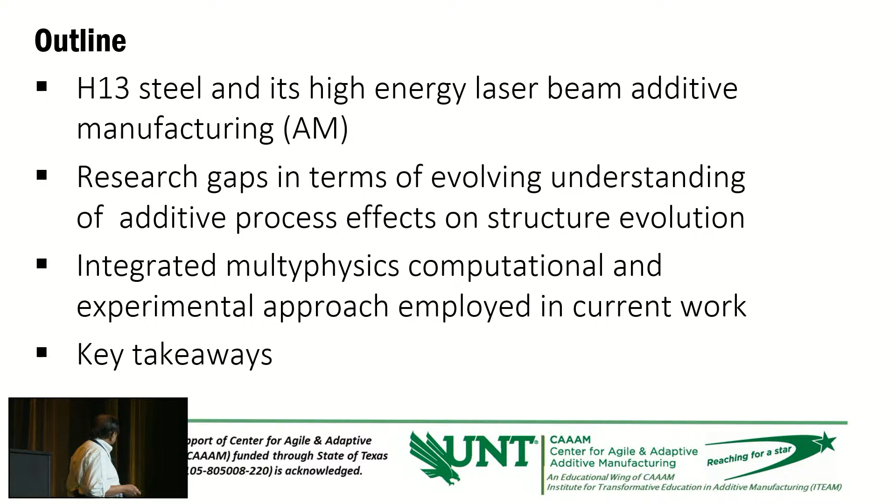As I said, H13 steel is very difficult to manufacture, especially with AM technology. It has very good high temperature mechanical properties. That's why it is used for permanent die molding, die casting molds. Most aluminum car engines are cast using these H13 molds, and many other automotive parts are cast using H13 tool steel.

So it's a very expensive material. I work with a lot of automotive companies. The dies are very large, especially when casting an aluminum car engine, which is pretty big—4-cylinder, 6-cylinder, 8-cylinder engines. So the die is also very big, and several other components are also cast out of aluminum using the H13 die. The molten aluminum is poured into the die, the casting cools down, and then it's removed from the die. But as you know, the automotive industry is a high volume industry.

So all these components are produced by the thousands in a day. The way they process this material, the casting is: they pour the aluminum in the die, and then the die moves into the next station where it is cooled by water spray to reduce the cycle time, and then that die is again used for the next casting. So it's continuously heated and cooled in a process, so it has to resist the thermal cycle.

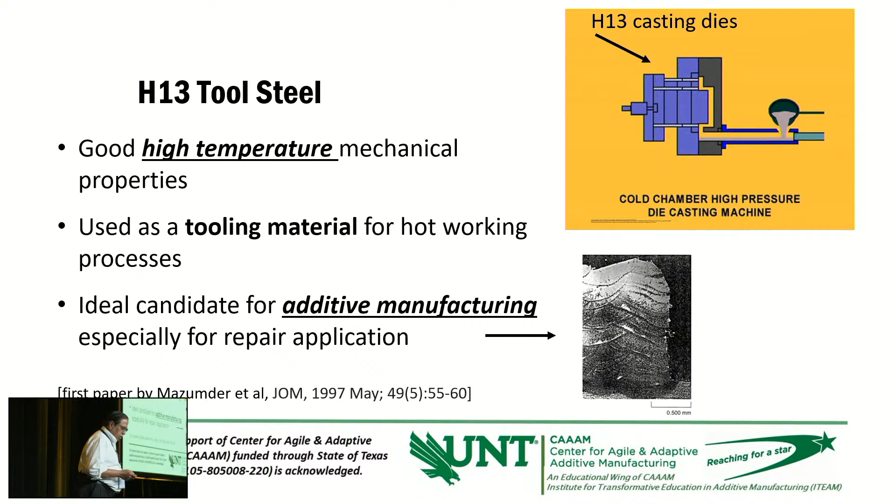So as early as the late 90s, this technology was used to produce H13 dies. There are a few efforts in the literature showing that these H13 dies were made using a high energy source beam with additive manufacturing technology. There are people who have used electron beam along with laser to deposit or manufacture these H13 dies.

Now, if you use laser beam technology, as I said earlier, it involves a very short time. Typically, the interaction time of the laser with the material is less than milliseconds, sometimes nanoseconds. And what happens is the time is very short and the interaction zone is very small, because the laser beam typically used in this additive manufacturing process is a few microns in diameter. So time is short, as well as the interaction zone is very small.

So what happens is monitoring this process is very difficult. If you want to do any in-situ diagnostic to see what's going on in the laser material interaction region, such as measuring temperature or looking at fluid flow characteristics in the interaction zone, it's very difficult - because the time is too short and the zone is too small, and there aren't many in-situ tools which can respond to these kinds of extreme conditions.

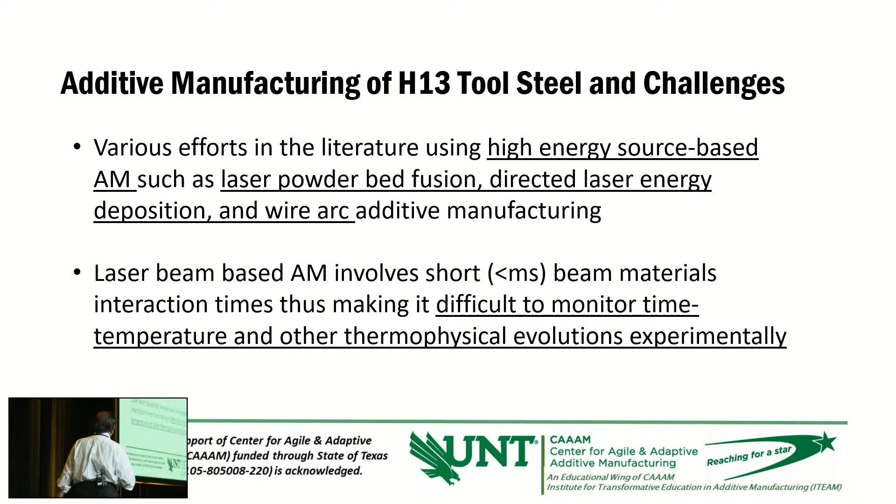So it's very difficult to monitor the AM processes. The only way you can do process predictions or gain understanding of this process is computational modeling.

In addition to these extreme thermophysical conditions, this process becomes more complex. The AM process becomes more complex because, as you know, the laser has a very small beam diameter, so you can fuse only a small portion of the material. So with that laser, you have to create a layer by putting multiple tracks in one layer, and then you have to deposit several layers to create a component of reasonable size and shape.

So it is a multi-track, multi-layer process that creates very complex thermokinetics in the process. And thus the process becomes very difficult to monitor, to control, or to get an understanding of.

In literature, people have tried to model this process to get better understanding, but most of the modeling is confined to either multi-track single layer, single track multi-layer, or single wall process. So what they do is model only a single layer with multiple tracks, or one track built by multiple layers. None of these two conditions come close to a multi-track, multi-layer process, where the thermokinetics is way more complex than what is projected by these two approaches.

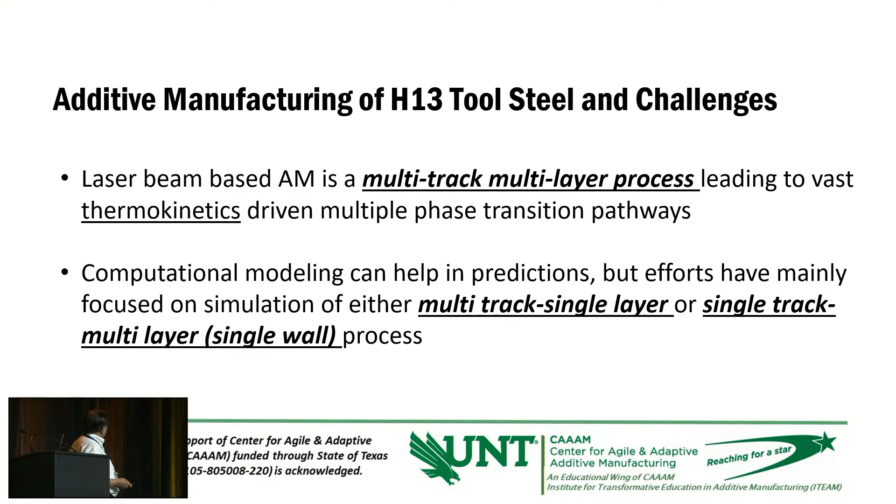So what our group, or our center, does is try to go as close as possible to this actual situation. I'm going to give you some snapshots.

I want to go back and emphasize the process parameters involved in additive manufacturing, especially laser-based additive manufacturing: laser power, laser scanning speed, the way the laser beam moves and the speed it moves at, beam diameter, and hatch spacing. Hatch spacing is the spacing between two tracks put next to each other, and then there's scanning strategy. I will talk about scanning strategy in the next few slides.

These are the major parameters associated with the laser-based AM process, and depending upon the combination of these parameters, the material produced after printing goes through solidification, giving you a different solidification morphology in the printed component.

It also controls the state of the phase, because the kinetics of the process controls the type of phase produced. It also controls the crystallographic texture depending upon the thermokinetics of the process, and sometimes brings in defects in the component, because the process is so rapid that it freezes the material and leaves behind porosity. It also controls the grain shape, size, and morphology. All these things are affected by the combination of parameters chosen during AM printing.

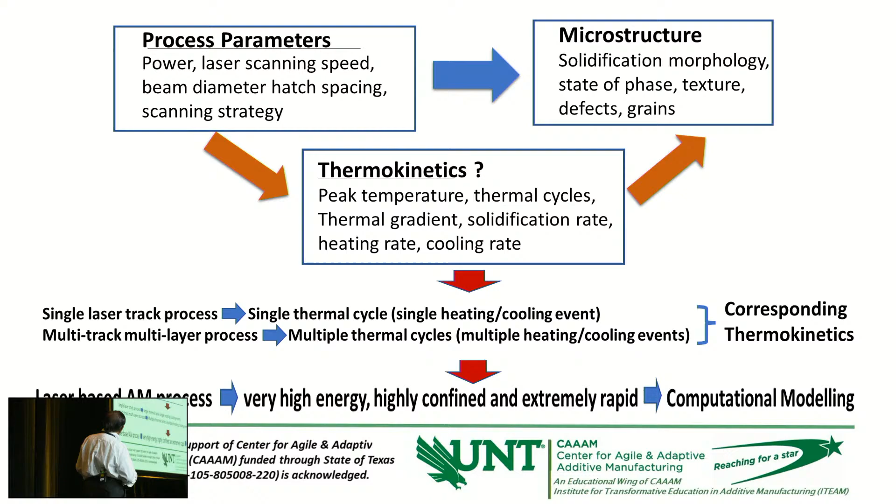So you want equiaxed grains oriented in different directions to get uniform properties in the material. To avoid the elongated grain situation, there are various scanning strategies, which I mentioned earlier. One strategy is to go in the same direction, which produces the elongated grain.

If you don't want elongated grains, we scan the beam in one direction in one layer, rotate it through 90 degrees, and scan in another direction in the second layer, then keep repeating that alternation of scanning direction from layer to layer. This creates a disruption of the epitaxial grain growth through the layers, giving a somewhat better distribution.

There are much more complex strategies also used. You can change to bidirectional scanning in one layer, going in this direction, coming back, going again, coming back. This bidirectional strategy can be used in one layer, then repeated with a 90-degree rotation in another layer, and that way you can start breaking the grain growth across layers and get much better equiaxed grains.

So there are a lot of ways you can control the grain structure, but in our experiment, we did only 90-degree rotation, an orthogonal rotation in a bidirectional scanning direction, to understand the process.

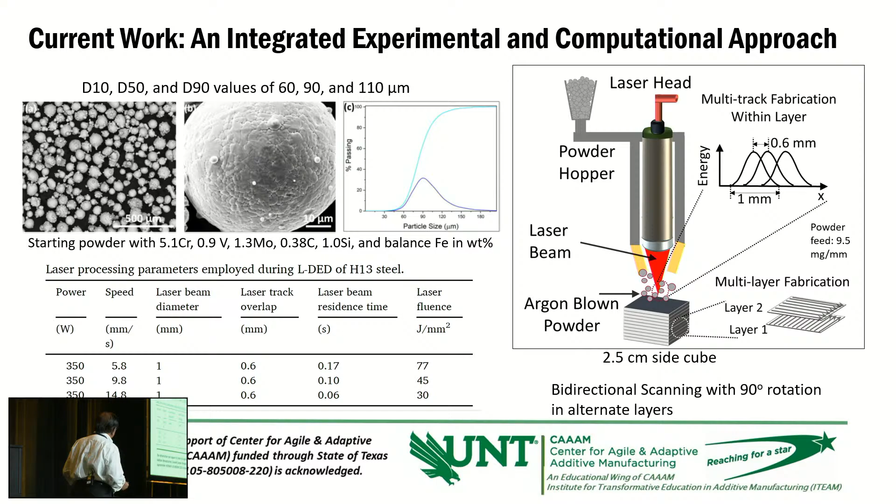So this is the same thing shown here. This is how the scanning is done in each layer, rotation through 90 degrees.

The computational approach developed for this kind of process involves two steps. One is a macro scale thermal model, which involves prediction of multi-track, multi-layer effects, and mesoscale, which is more confined to the thermofluidic model predicted in the melt pool, because the material melts and then solidifies.

Within that melt pool, the behavior is predicted by the mesoscale model, and that is repeated in a macroscale from layer to layer. So this thermokinetics model is divided into two steps: mesoscale and macroscale. Mesoscale talks about the grain growth within one track, and macroscale talks about the grain growth or phase transformation across the layers.

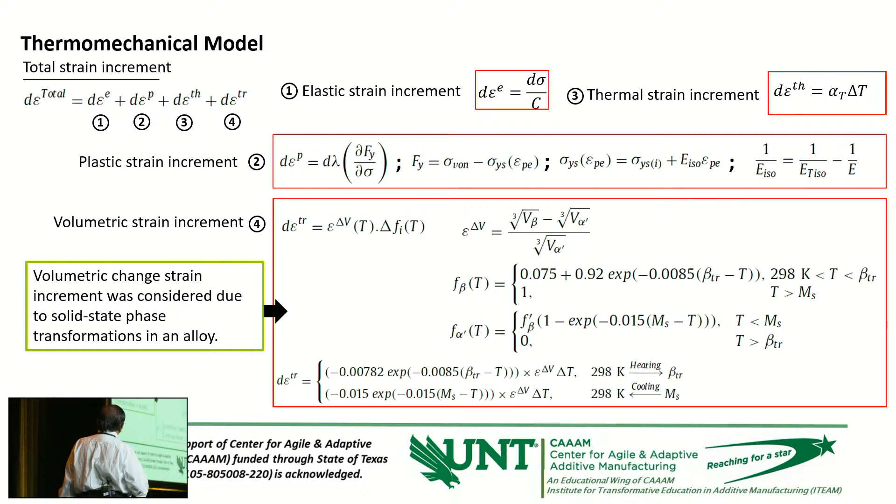These are very generic equations I put in here, and these equations should be solved using material properties. Oftentimes, to solve this equation, you need the thermophysical properties, especially thermophysical properties dependent on the temperature, because it goes through the melting temperature all the way to the room temperature.

So if you have more detailed properties, values of these different properties, the more accurately you can predict the microstructure evolution in the process. Now, one thing I want to show you here, I'm just giving you a broader snapshot. What is important to look for in this model-based predictions?

One is with these models, you can get the solidification rate, you can get a thermal gradient, you can get a cooling rate, and you get a morphology factor.

So solidification rate will control how large or small the grains are formed within the final structure. Thermal gradient will give you how the grains grow, in what direction they grow, and what crystallographic texture will they produce. Cooling rate will again...

decide how fast the material is cooling down from the liquid to solid and within the solid state. And that will decide grain size, shape, as well as the phase transformation. And the morphology factor is, again, whether the grains will be elongated, equiaxed, or something in between.

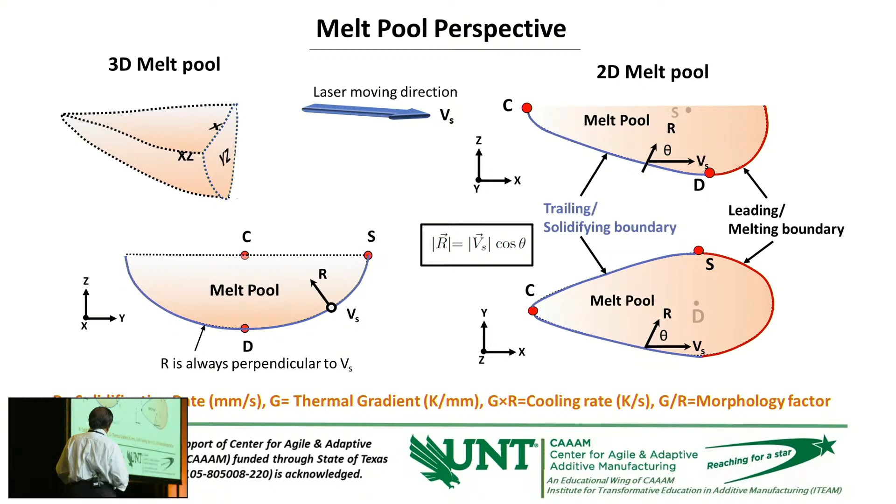So there are a lot of assumptions you have to make because these models are very difficult to develop, and there is not much information available in open literature. So you have to make a lot of assumptions.

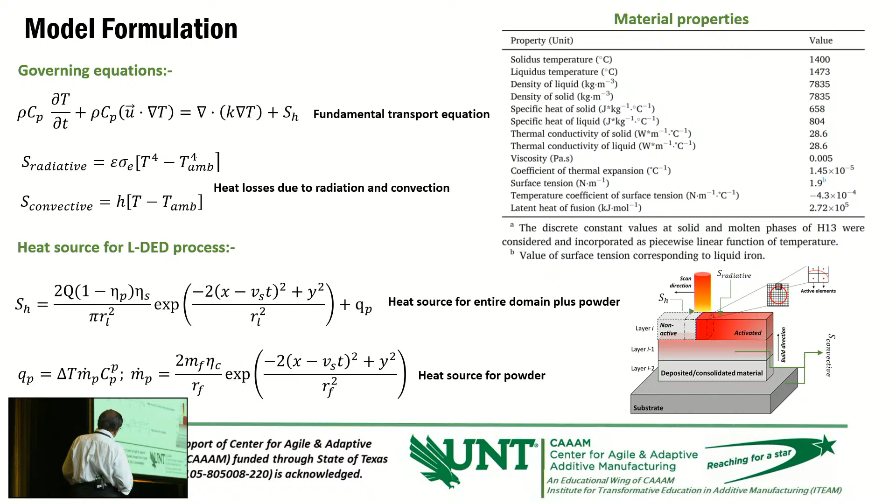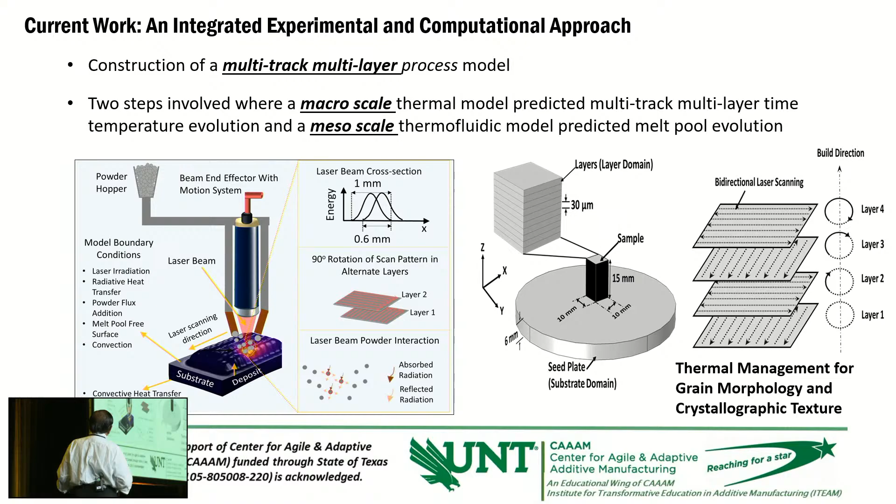Powder addition in the melt pool was assumed to be homogeneous with a Gaussian in-flow distribution. Powders are thrown into the laser beam, and the distribution of the powder flow is Gaussian, given by this equation. The laser beam energy distribution is also Gaussian type, and that is what's considered in the model.

Momentum due to the impact of powder particles on the melt pool was neglected. When powder gets injected into the laser beam, the particles get molten and melt instantaneously, but some powder particles sitting on the periphery of the beam partially melt or don't melt at all, and they go down and impact the melt pool. That effect is neglected here. What we assume in this model is all powder particles melt completely before they go down onto the substrate and form a deposit.

Also, when powder gets injected into the laser beam, it is solid powder initially, so the laser beam gets reflected from the particles, and there's a loss of laser energy by reflection and scattering from the powder particle. That is considered as zero here; we assume there is no scattering and reflection. Over time, we are developing a more complex model which will take all these effects into account eventually, in the next few months to a year. But this particular model does not account for these effects of the process.

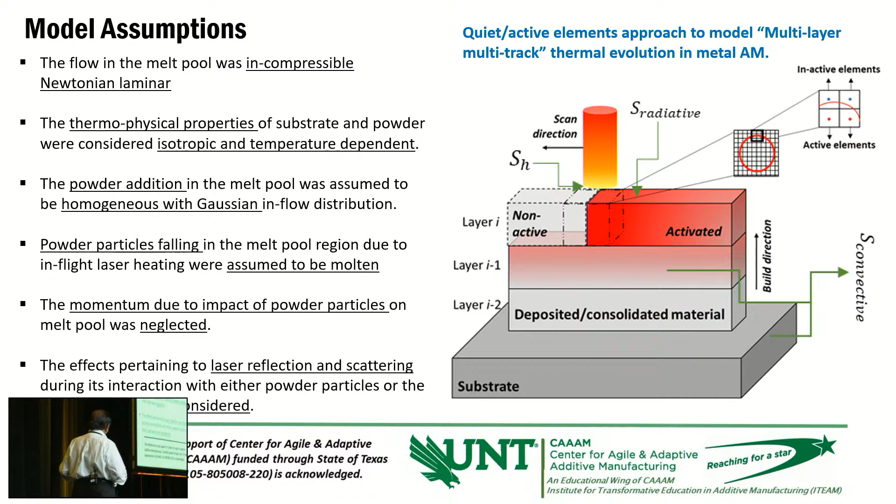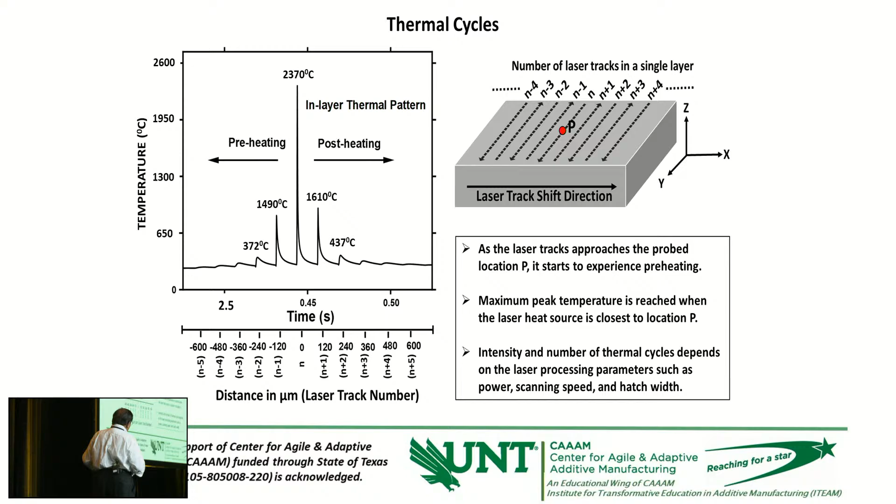So look at the multiple layers. Your computational probe is at the same point in the first layer, and it is now looking at the heating cycles around it, and also above it when the next layer is put above that one.

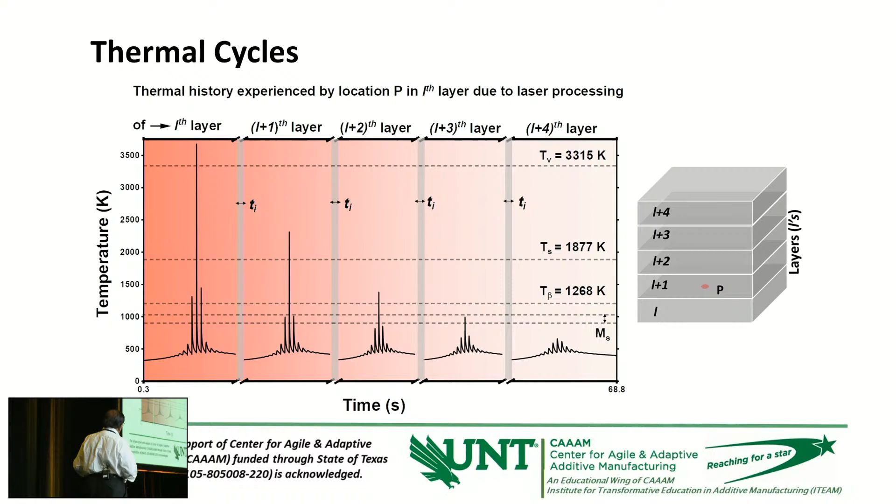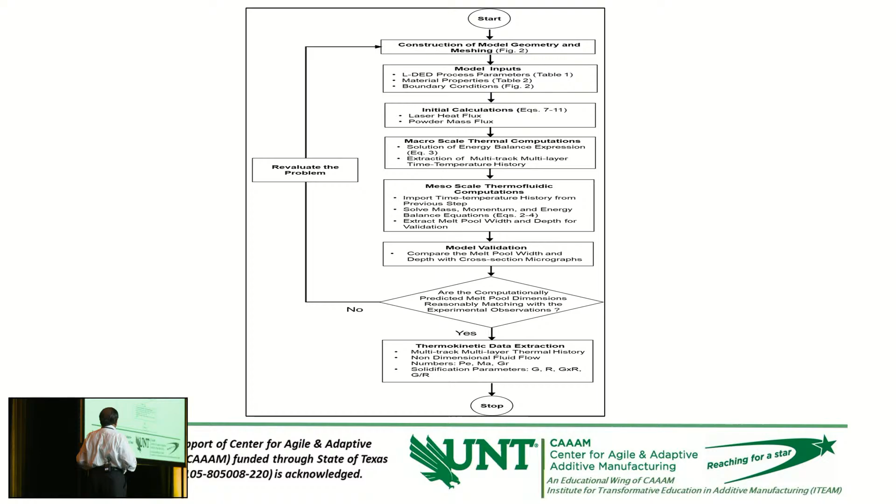So all this is built into this program, and you can predict the temperature at any point in any layer, the temperature cycles, thermal cycles, what it will experience at any point, any layer, and then you can predict what phase transformations or what grain size or grain development will take place at that point. So let me show you some of this kind of model.

So by those models, we first confirm the accuracy of the model by confirming the prediction of the melt depth and melt width by that model. Once if it doesn't match, then we tweak the model to match with these measurements experimentally. And then once it is close enough, that model is ready to use for the prediction of all other effects in the material.

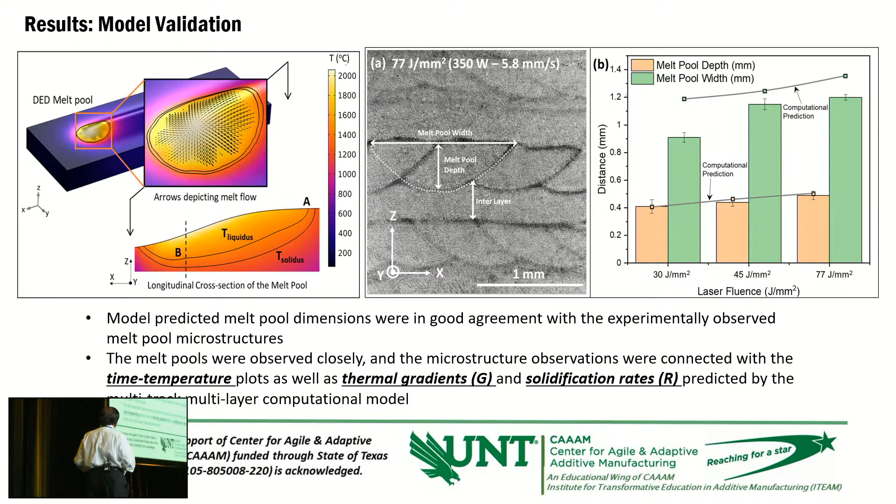So that is shown here. These are computational predictions, and these are the experimental measurements of depth and width, and so on. So with this, then what we do is predict the phase transformation in the material, or the time temperature transformation in the material.

You can see these are three different conditions. As I mentioned earlier, the H13 deposition, the AM process, was done under three different input energies: 30, 45, and 77. These are the temperature cycles, and you can see the highest temperature, various important temperatures given here, and these are the temperatures of the various transformations in the material, H13 - melting point, then transformation of austenite to martensite, and so on.

Those can be easily predicted, and how often that temperature is raised at that point is given by these thermal cycles - the thermal cycles at the same point, layer by layer. In this case, with higher energy input, that one point, the computational probe, experiences high temperature up to the third layer cycle. Whereas it drops down substantially by the third layer under this condition, and it barely reaches high temperature for that point in the third layer, and so on.

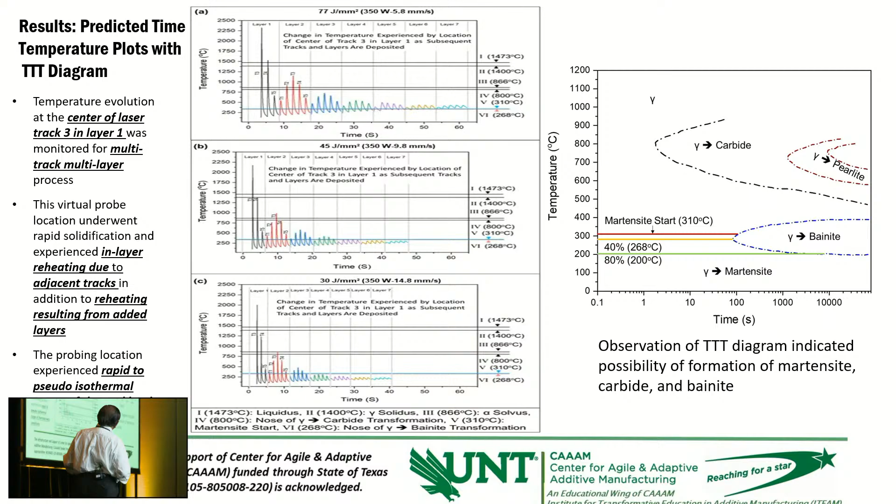So these important temperatures and corresponding transformations are listed here for the H13. Again, the same diagram I have given in a much better expanded version here.

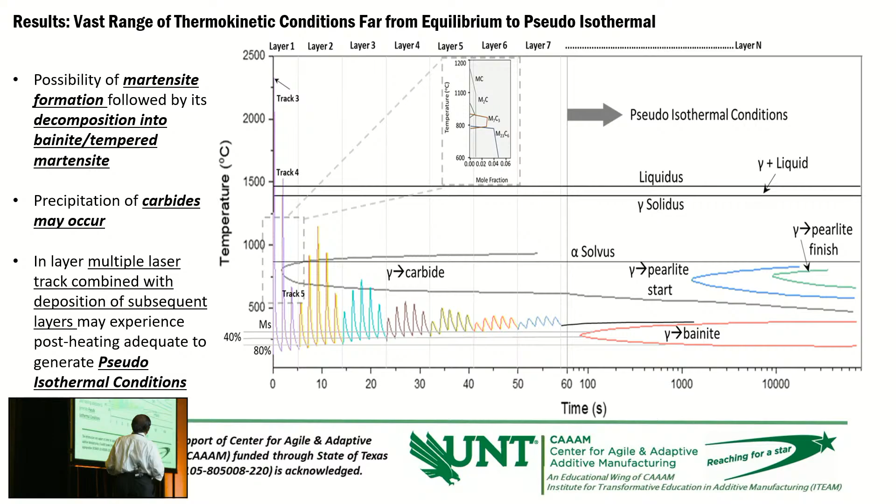So let me explain what we did experimentally. We studied what phases exist in this AM process sample, done by X-ray diffraction, and these confirm that these phases do exist at this temperature transformation regimes and so on.

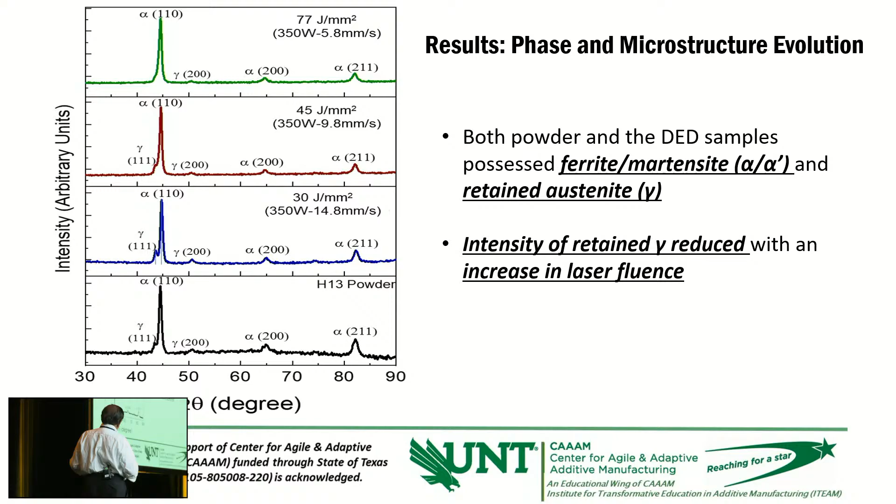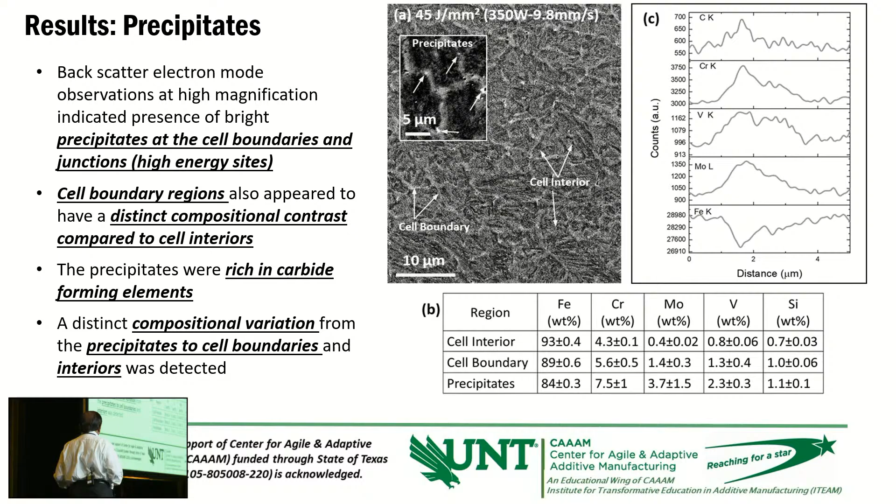All these things can be precisely located. Some of these transitions can be located, such as formation of precipitates along the grain boundaries, along the triple junctions, and composition contrast in the cell interiors. All those things can be predicted by these thermokinetic plots, plots of the different thermokinetic parameters as a function of time or distance.

So we have done quite a bit of detailed observation using techniques such as transmission electron microscopy to see whether these kinds of plots are predicting temperature and various events during the thermokinetic process at different locations like this. And they were indeed noticed through these observations.

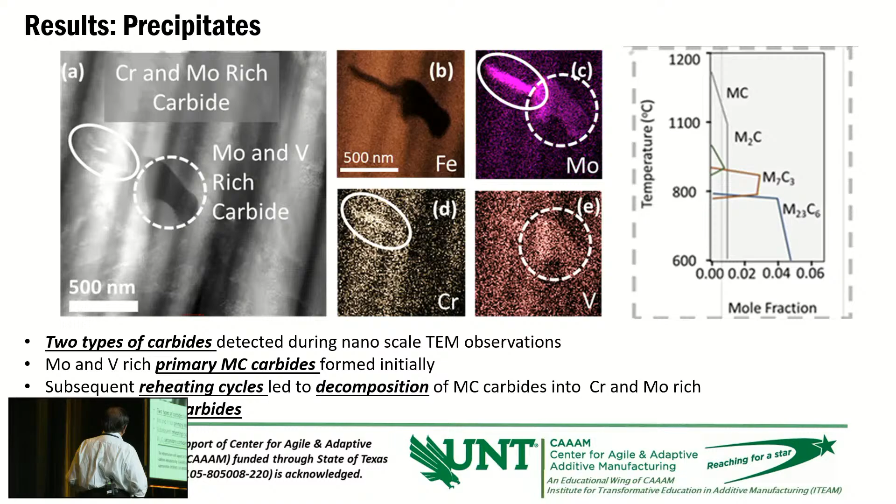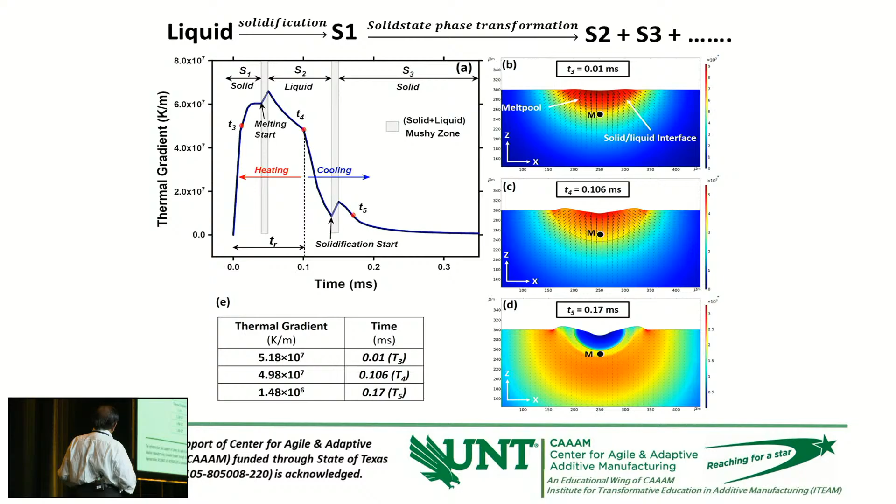Because if you look at, go back here and look at the cooling rates, somewhere I mentioned the cooling rates, very high cooling rates. Oh sorry, here, these are the cooling rates.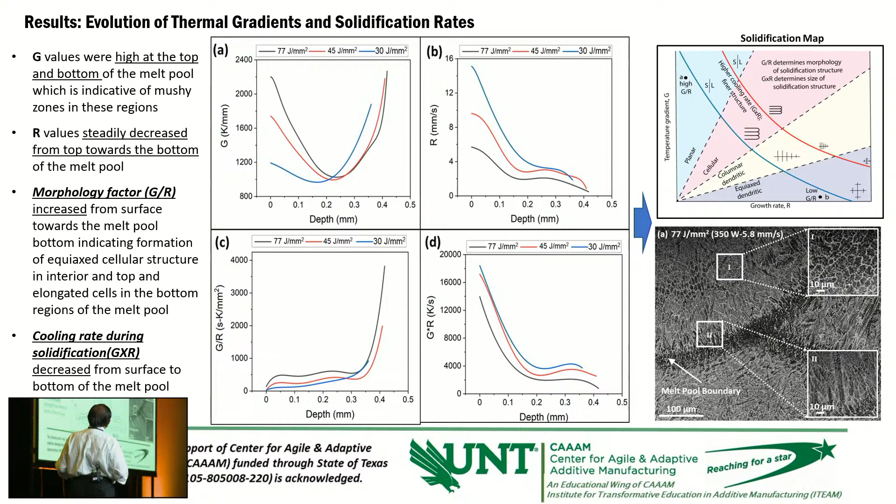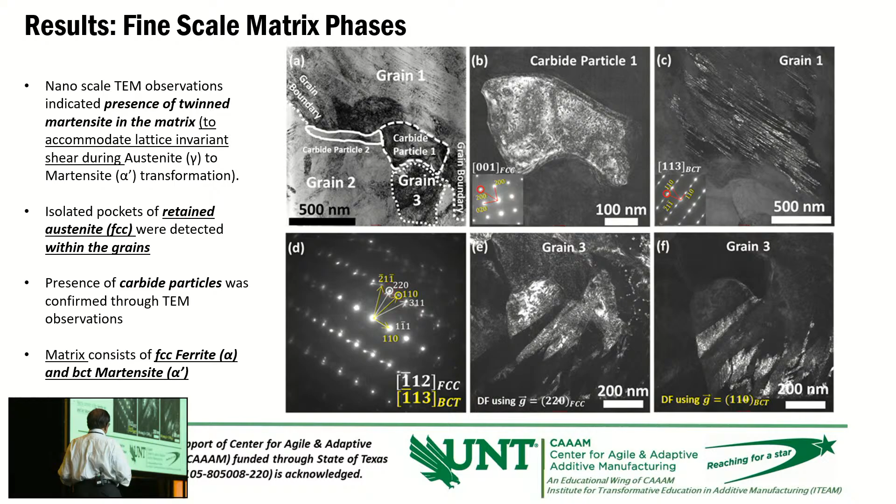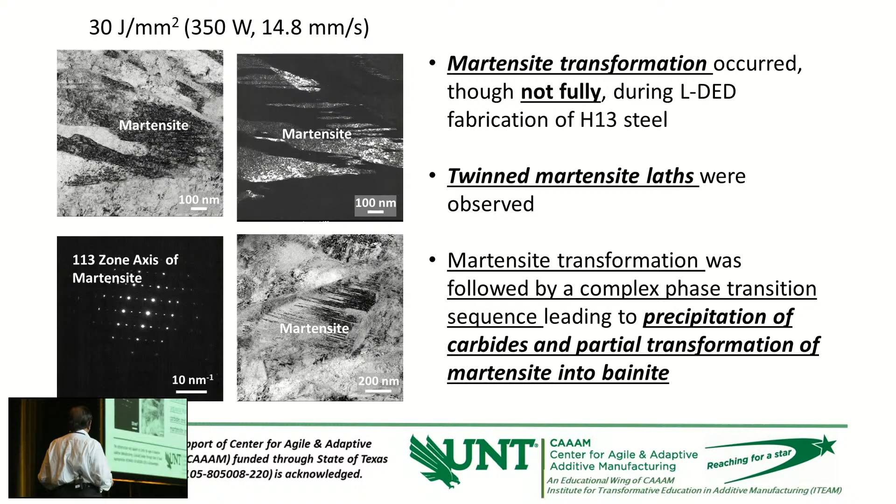You get very high cooling rates here, and those cooling rates produce microstructures with twin martensites and so on. Also, such high cooling rates retain austenite, so the martensite transformation is not complete. Then in subsequent thermocycling, due to layer by layer and multi-track deposition, you get tempering of the structures and carbide formation, or dissociation of these carbides into bainitic structure and so on.

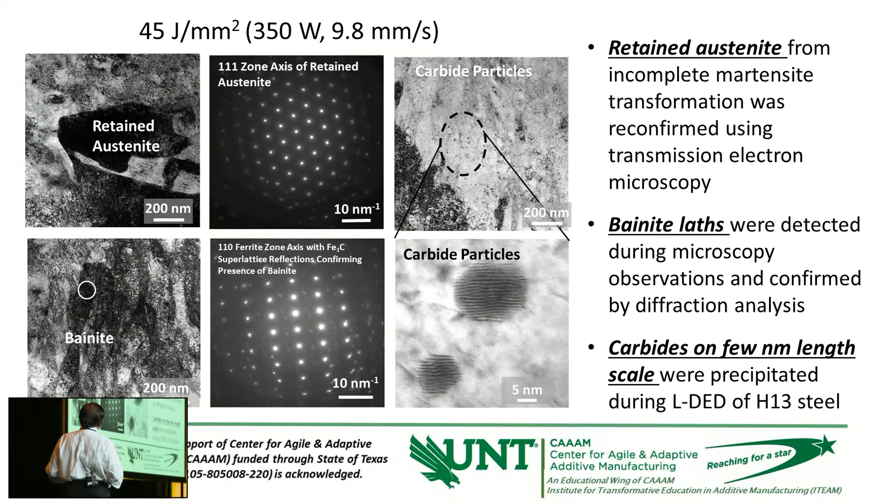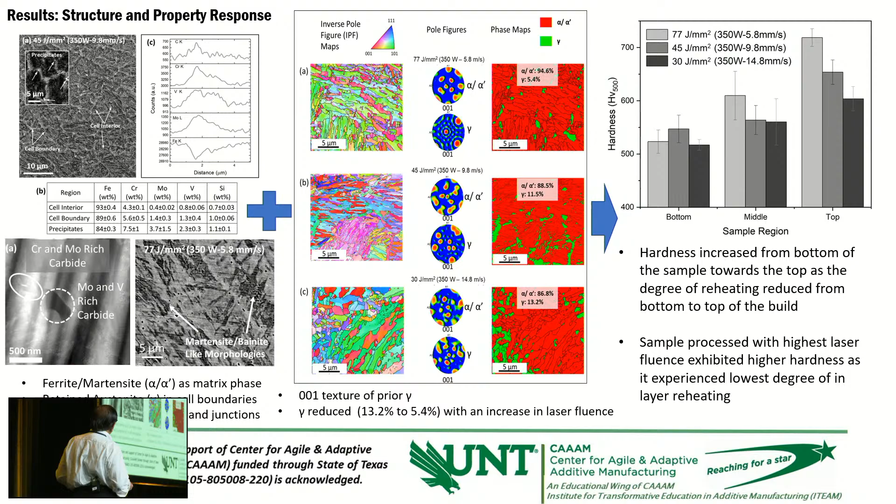So all these things have been confirmed by observations based on TEM. Ultimately, through model-based prediction, you can predict the microstructure, which can be verified by various experimental techniques, and you can get the required properties associated with this kind of microstructure development in the process.

So basically all this can be interlinked together once you know the thermokinetics of the process. Another way to say it: you can tailor the processing parameters such that you control the formation of these phases. Some phases can be avoided during processing to get required properties, and you can control microstructural morphology, grain morphology, as well as crystallographic texture, though I haven't gone into detail on how you control crystallographic texture by controlling the thermokinetics of the process.

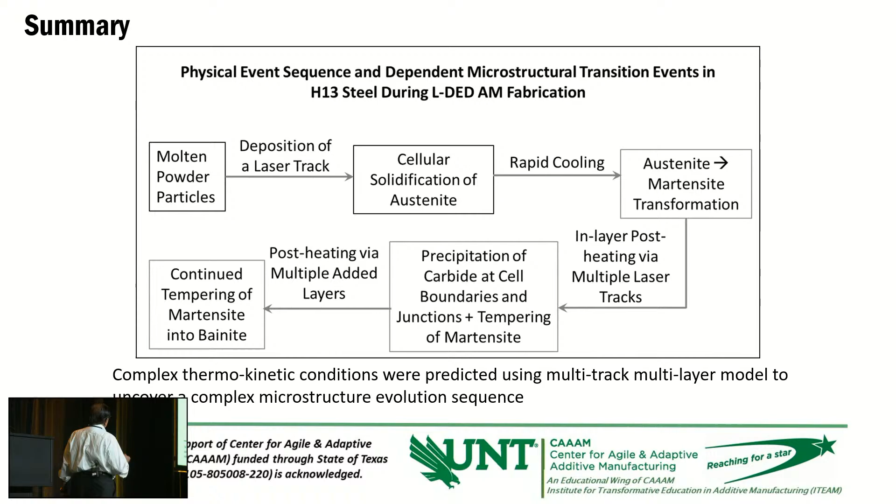So all this can be predicted as well as controlled by knowing the thermokinetics of the process through computational modeling, and so on. We have been doing that for various AM-based processes under our center.

As you see, this is the directed energy deposition process with powder injection, which I talked about. Then there is the powder bed process, where the powder is stationary in a container and the laser beam scans over the powder. Then there is surface modification, where you don't have to build the AM component from bottom up—you have an existing component, and on top of that you can deposit layer by layer new material to build another layer to get the required properties.

And this is a solid state AM process, where you use friction stir welding to weld layer by layer material on top of each other to get the component. Each of these processes has different thermokinetics, and accordingly you have to modify the equations to predict the thermokinetics of the process, and then predict the microstructure as well as the phase structure in the material. All these things have been looked at in our center.

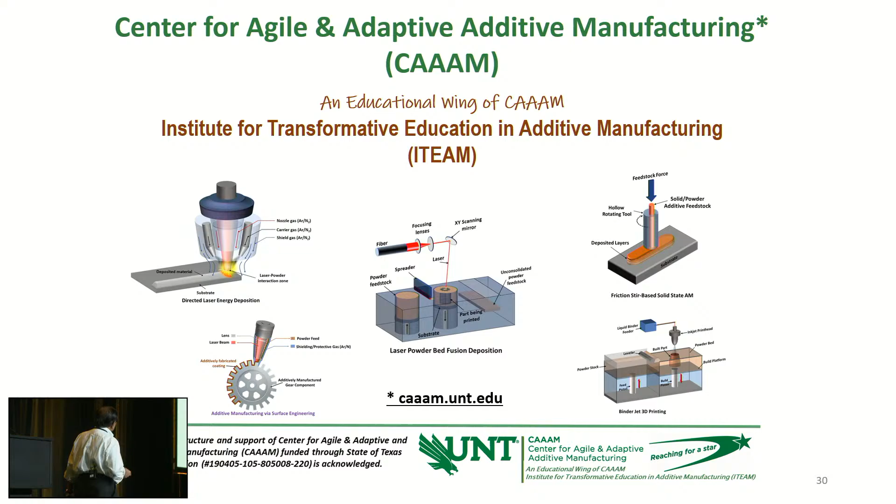So I think with this, I've given you quite a bit of a snapshot of how to approach this AM process to get better control over it, so you can produce components with the desired properties for the intended application of that component. I'll stop here, and if there are any comments or questions, I'll be glad to respond.